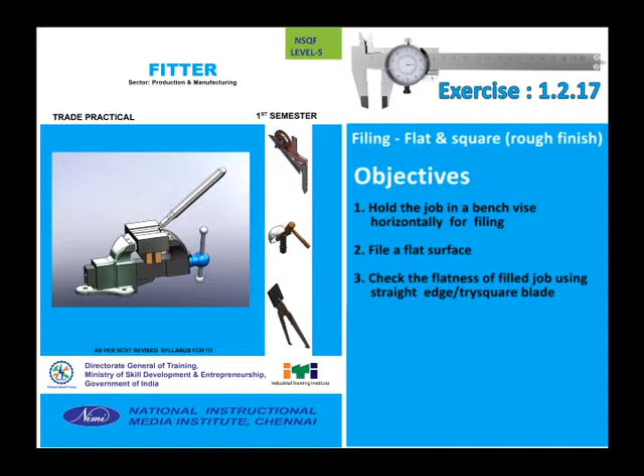1.2.17 Filing flat and square rough finish. Objectives: hold the job in a bench vise horizontally for filing. File a flat surface. Check the flatness of the filed job using a straight edge or try square blade.

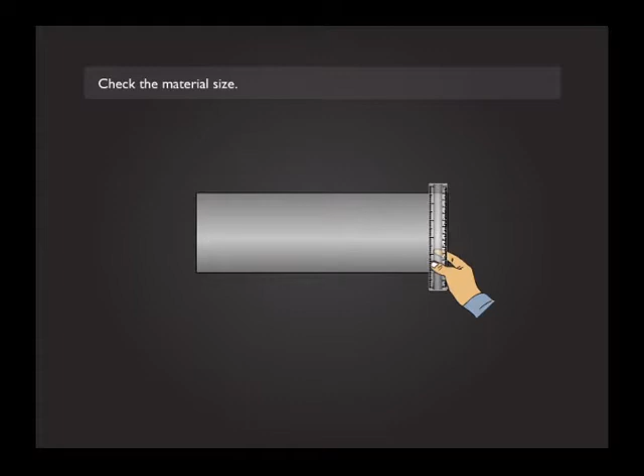Job sequence: check the material size. Fix the job securely in the vise. Select a bastard file for rough filing and a second cut file for finish filing.

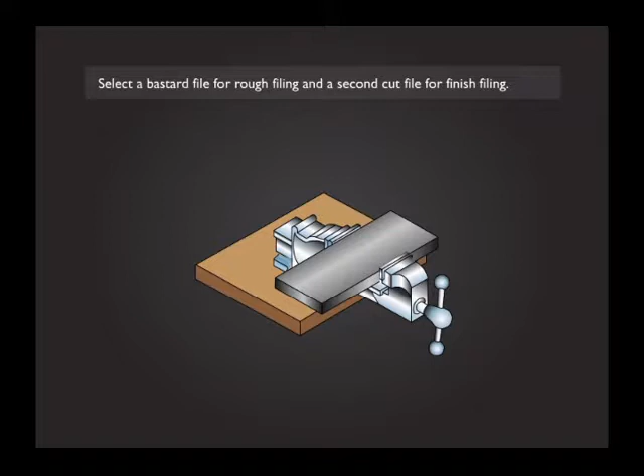File all 4 side faces, 1, 2, 3 and 4, to remove burrs and any visible waviness.

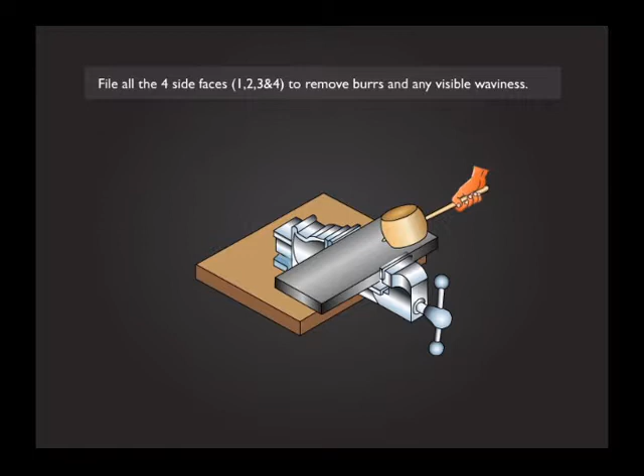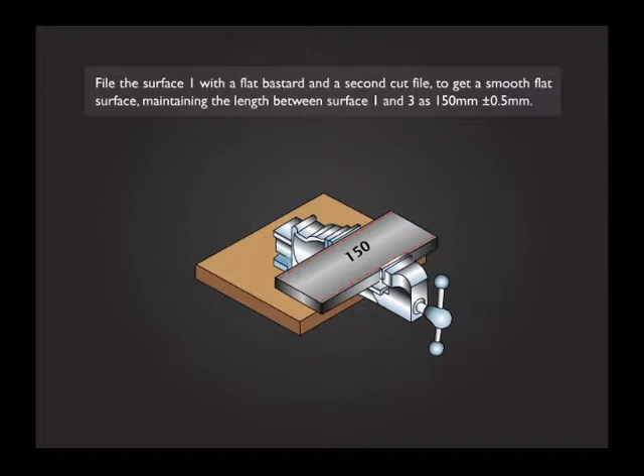File surface 1 with a flat bastard and a second cut file to get a smooth, flat surface, maintaining the length between surface 1 and 3 as 150 mm plus or minus 0.5 mm. Check the flatness with the blade of a try square.

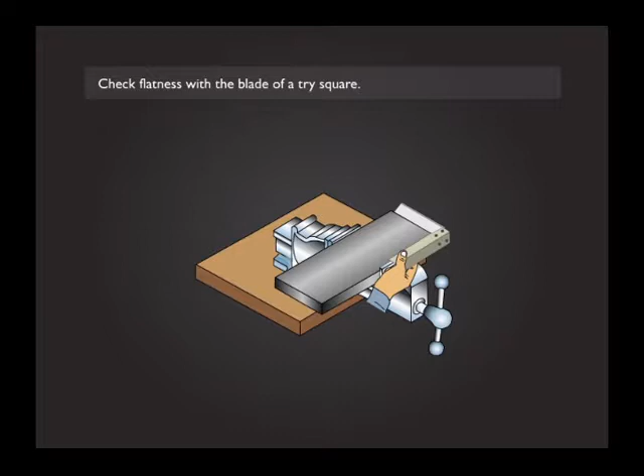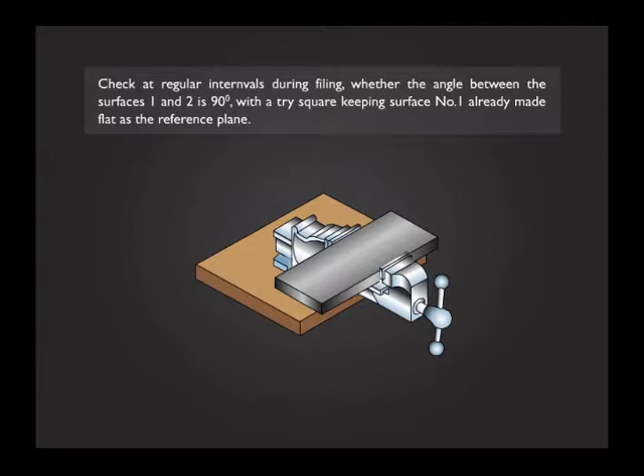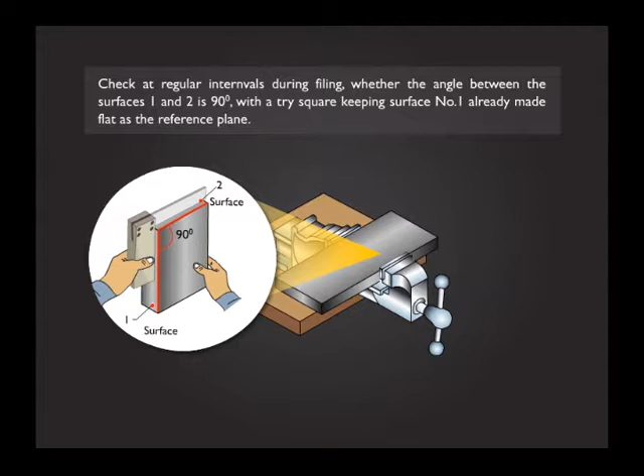File surface 2 with a bastard file and a second cut file. Check at regular intervals during filing whether the angle between surfaces 1 and 2 is 90 degrees, using a try square, keeping surface 1, already made flat, as the reference plane.

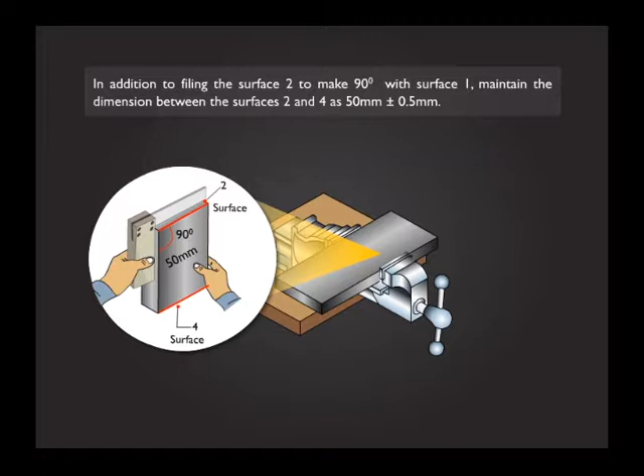In addition to filing surface 2 to make 90 degrees with surface 1, maintain the dimension between surfaces 2 and 4 as 50 mm plus or minus 0.5 mm. Make a final check for the dimensions using a steel rule and for the 90-degree angle between surfaces 1 and 2.

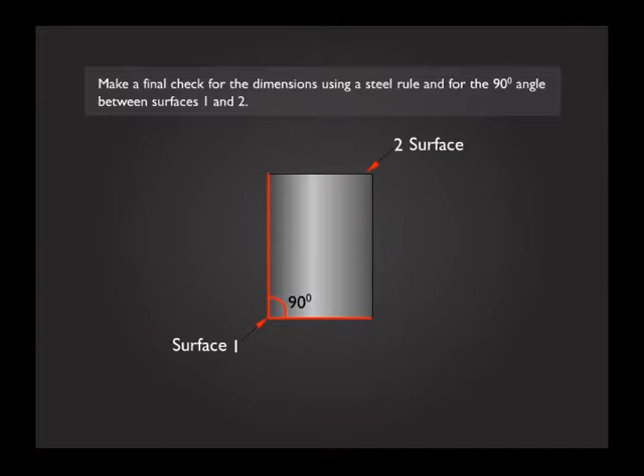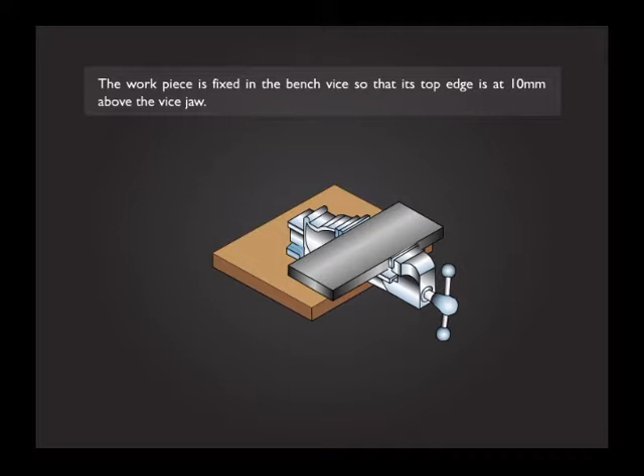Skill sequence: the workpiece is fixed in the bench vise so that its top edge is 10 mm above the vise jaw. Remove the burrs on the edges of the job to avoid injury to your hand.

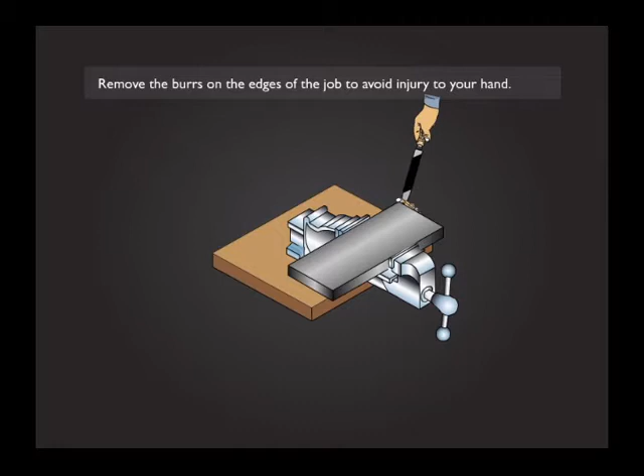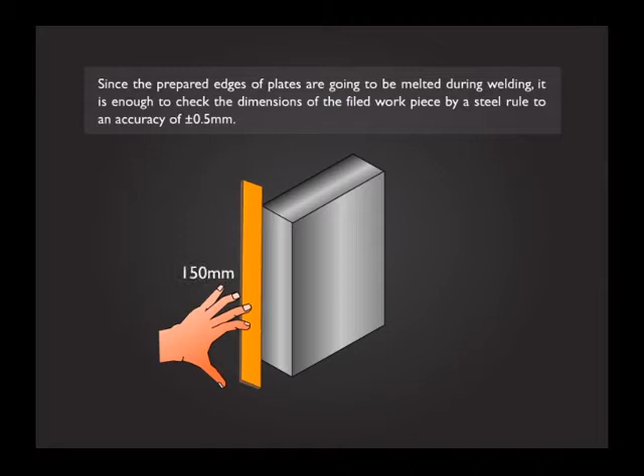Since the prepared edges of plates are going to be melted during welding, it is enough to check the dimensions of the filed workpiece with a steel rule to an accuracy of plus or minus 0.5 mm.

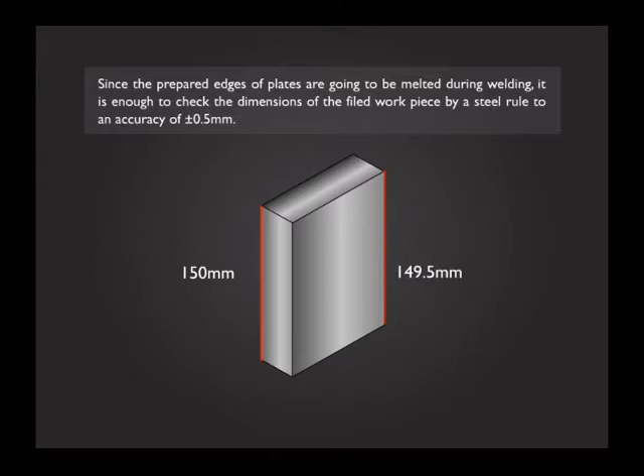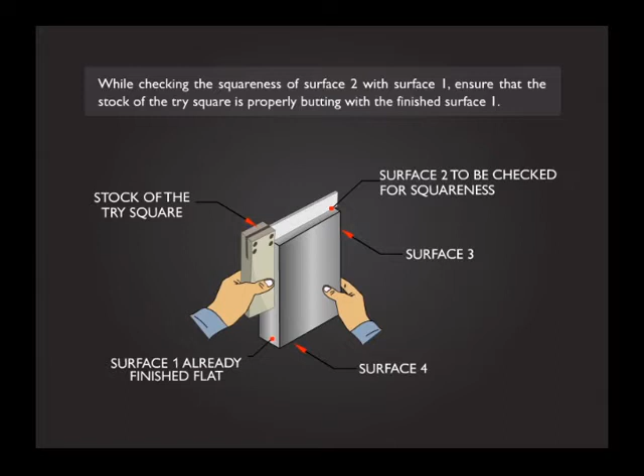While checking the squareness of surface 2 with surface 1, ensure that the stock of the try square is properly butting with the finished surface 1.

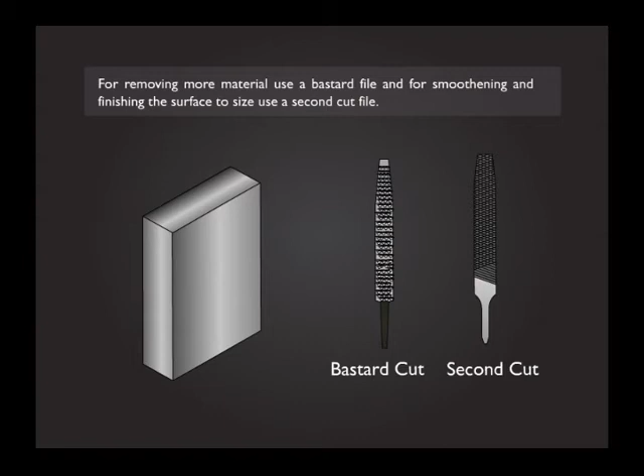For removing more material, use a bastard file, and for smoothing and finishing the surface to size, use a second cut file. Avoid rocking of the file, which will produce a slightly convex surface instead of a flat surface.